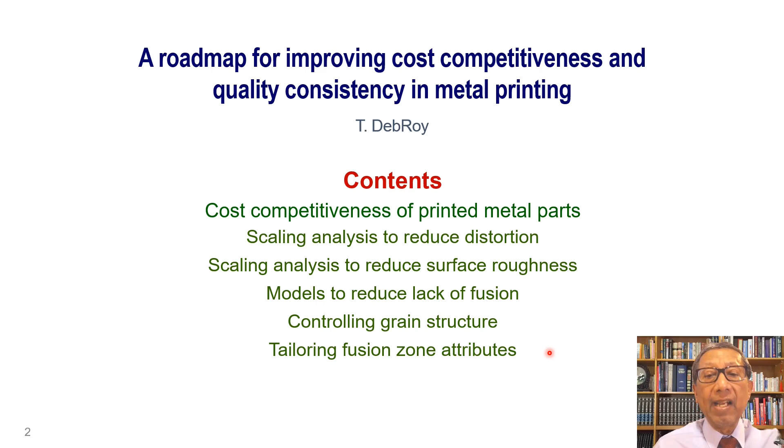For metal printing, both the feedstock and the machines are quite expensive. So it is fair to ask if the additively manufactured parts can be cost effective. And we asked that question several years ago, and we did a survey of the usage of printed parts in various industries ranging from consumer products to automotive, to healthcare, to energy, to aerospace and marine industries. And we found that parts made by additive manufacturing are widely used in all of these industries, and the different numbers here show the revenue share of the additively manufactured parts in those industries.

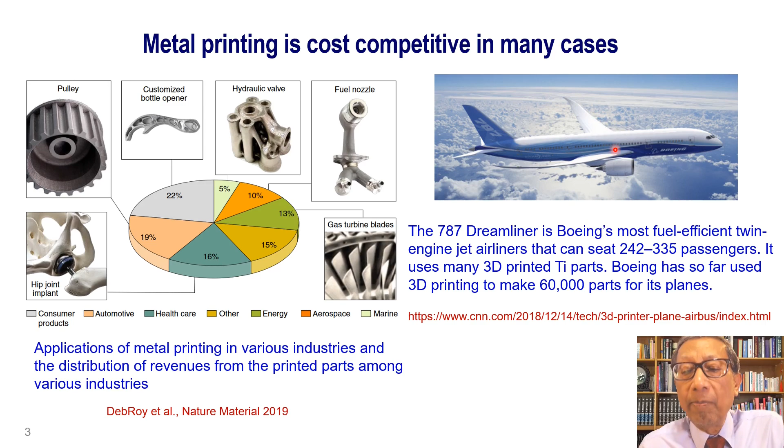On the right, we have the Boeing 787 Dreamliner, which is the most fuel-efficient twin-engine jet airliner that can carry several hundred passengers depending on the specific model. And it uses several 3D printed components. And other aerospace companies are also using 3D printed parts. So additive is cost competitive in many industries.

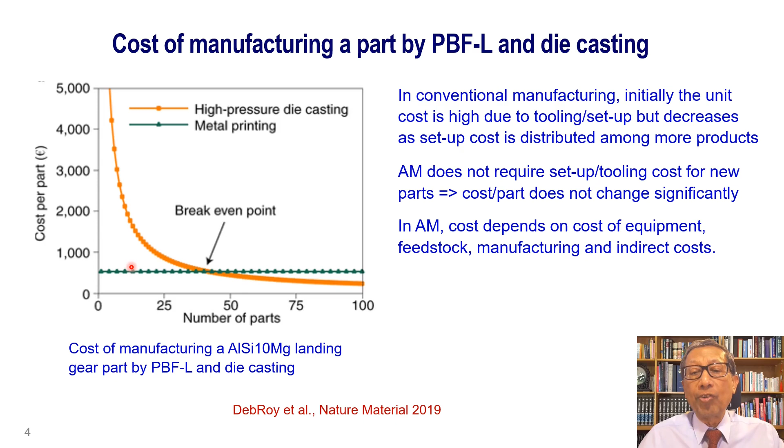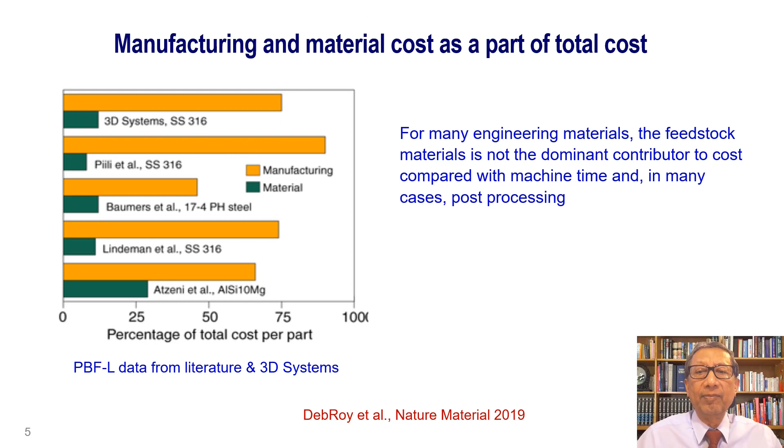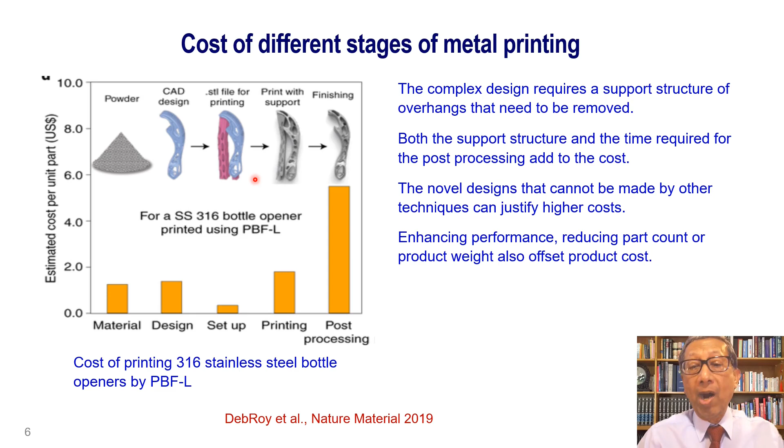Here's a breakdown of the various costs for the printing of a stainless steel bottle opener. This is a complex design and it needs a support structure shown here for printing. So both the cost of making this support structure as well as removing the support structure after the part is printed add to the cost. Now, if the part is so complex that it cannot be made by any other means, then the high cost may be justified. Similarly, reducing part count or part weight can also offset product cost.

Defects are very common in additive manufacturing. For example, there can be cracking, lack of fusion, residual stress and distortion, and in extreme cases, parts can be separated from the base plate, so there can be delamination, and also many of the alloys contain volatile components, and at high temperature they can be selectively vaporized so that the composition of the final part may be different from the composition of the initial feedstock.

So all of these defects have to be mitigated while a new part is being developed. And because the cost of the machine and the cost of the feedstock are pretty high, we cannot do trial and error testing that we can do with conventional manufacturing. So models provide a very good solution because they are based on scientific principles and they require a minimum amount of testing. So I'm going to give you two examples of models to avoid distortion and surface roughness.

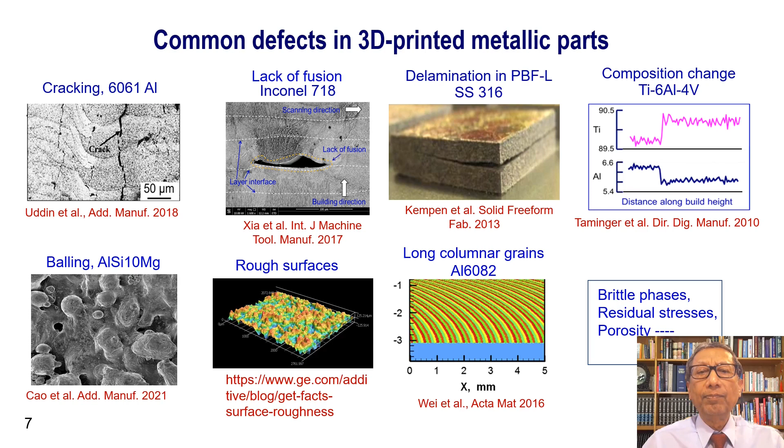Distortion is very common because of rapid heating and cooling. Important variables that affect the distortion include process variables such as power, speed, powder feed rate, and deposition time, and also material properties such as density, rigidity of the material, and other parameters affect the extent of distortion. So our goal is to express maximum strain as a function of process variables and material properties.

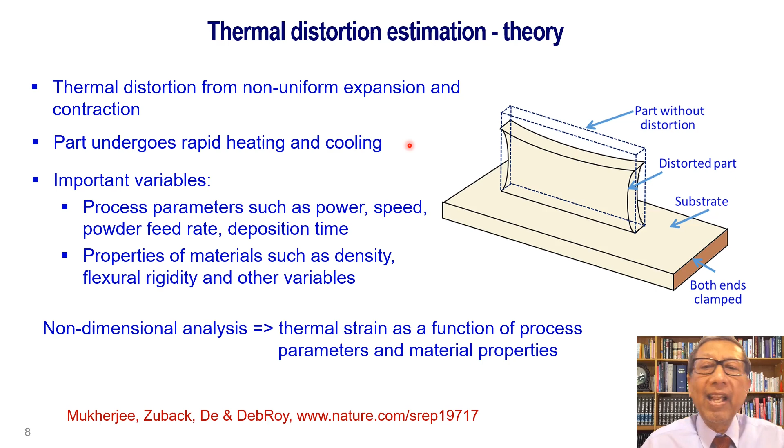To build a model for thermal distortion, we use scaling analysis based on Buckingham Pi theorem. The important variables are listed here. Volume expansion is the product of volumetric thermal expansion coefficient multiplied by temperature change, heat input per unit length. If the heat input is large or if the volume expansion is large, the part will be more susceptible to distortion. Similarly, if the total time taken is large, the part will be more susceptible to distortion.

Also, if the part is rigid, then it will oppose distortion. Higher density materials will also oppose distortion. And finally, Fourier number, which is the ratio of heat transported to heat stored. If the Fourier number is large, that means heat is transported quickly, and that will mean lower distortion.

So when we combine all of these variables into non-dimensional terms, we get 3 pi terms, and when we combine all of them, we get an expression for the distortion or strain, maximum strain, which is proportional to beta times delta T, which signifies volume expansion, and is proportional to heat input per unit length raised to the power 3 by 2. It's proportional to time, inversely proportional to EI, which represents rigidity, inversely proportional to F, which represents Fourier number, and inversely proportional to square root of density. So we are going to check how experimentally we can validate this expression.

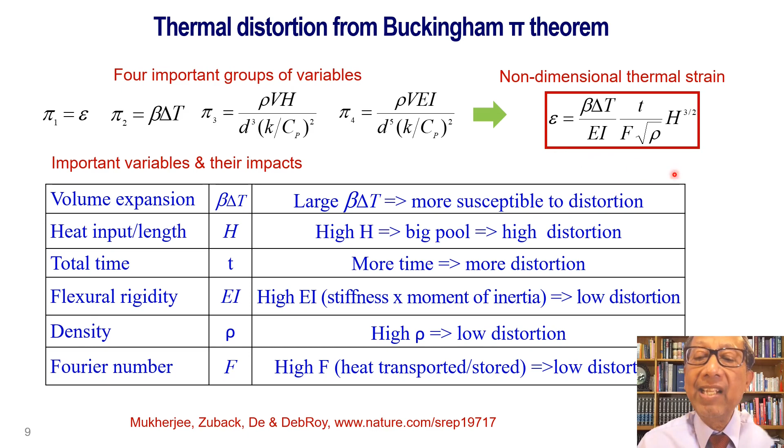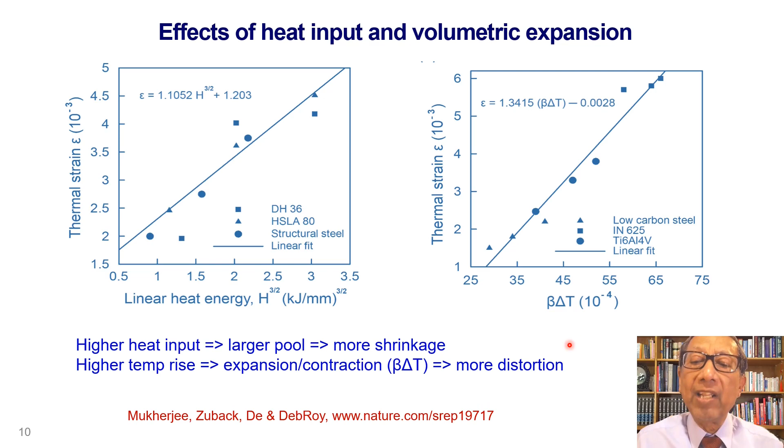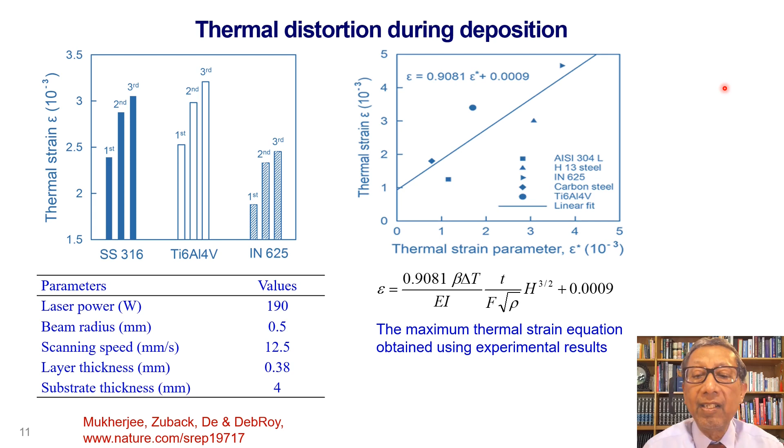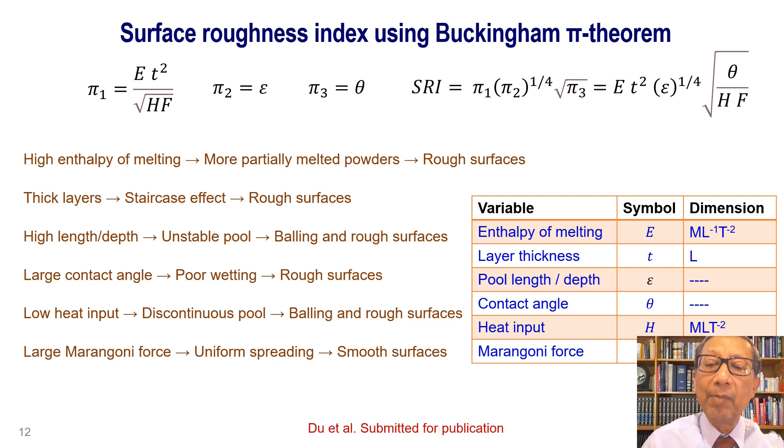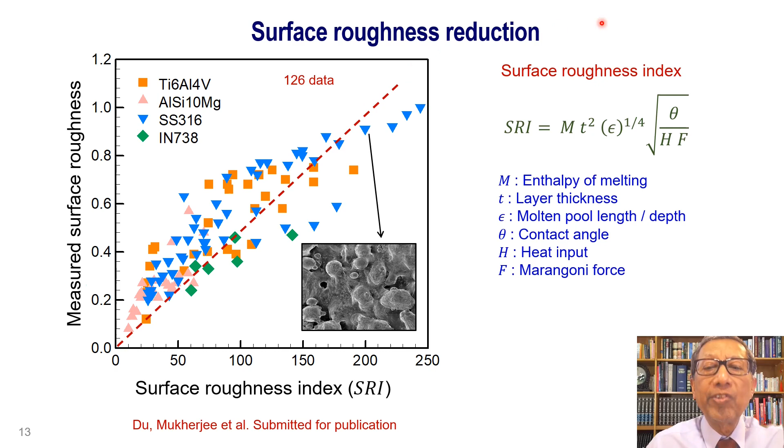And we can plot the SRI as a function of experimental data on these variables so that the model can be validated. Here we compare the computed surface roughness with the corresponding measured experimental values, and they seem to show a fair agreement with 126 independent experimental data. And these type of models, when they are validated, can be used to reduce roughness.

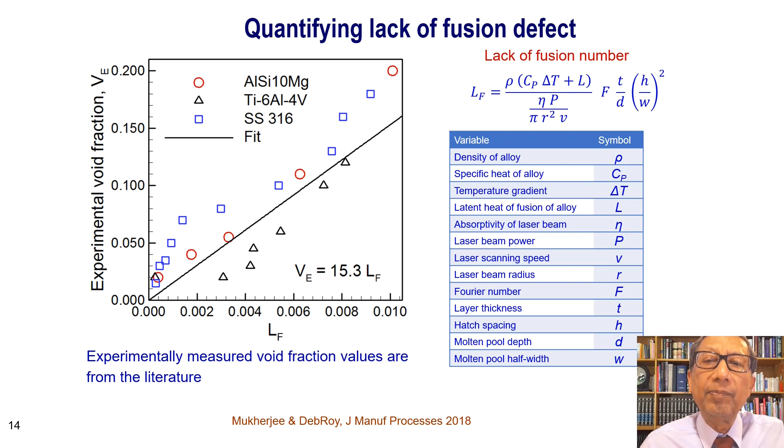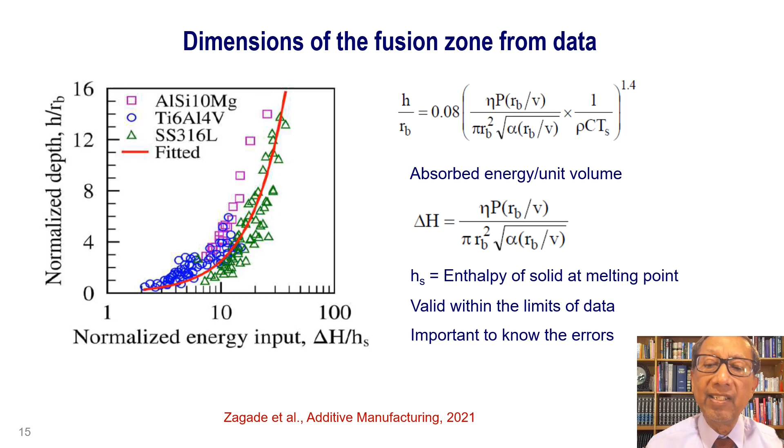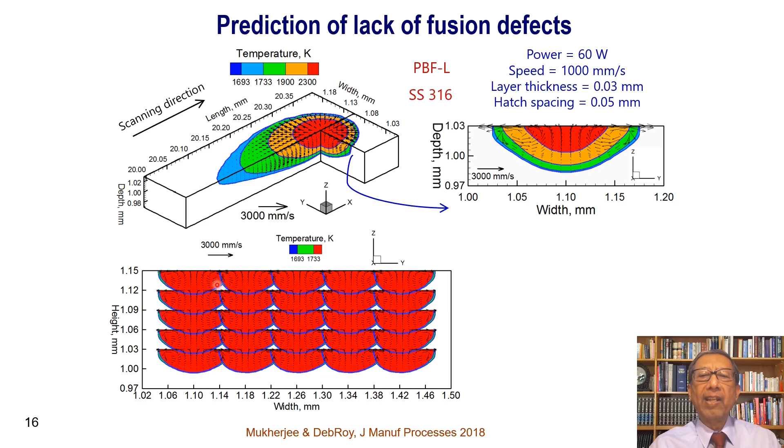A well-tested heat transfer and fluid flow model can calculate the fusion zone geometry in different hatches and different layers. And unmelted regions between the two consecutive tracks and layers indicate the lack of fusion defects. To make a fully dense part, there needs to be sufficient overlap among different adjacent hatches and layers. For a given alloy, higher power and slow scanning will result in larger fusion zones and less lack of fusion defects. And just the opposite will also happen.

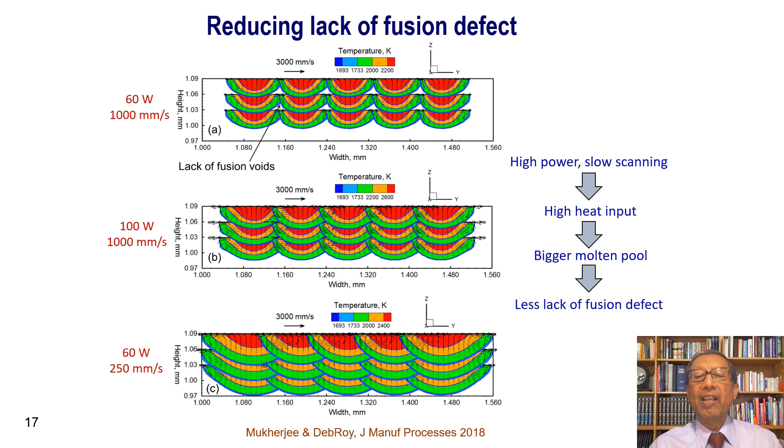That means if the power is low and scanning speed is fast, then the fusion zone would be smaller in size and there is likely to be less overlap between adjacent hatches and between layers. And for a given set of process variables like it is given here, the thermophysical properties of the alloys determine the size of the fusion zone. And this is what we see here. In case of stainless steel 316, the fusion zone size is smaller than aluminum silicon 10 magnesium alloy.

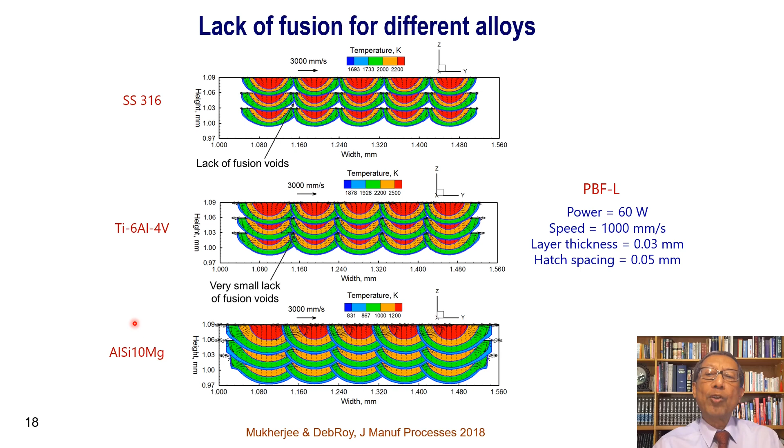And so in case of stainless steel 316, for these processing conditions, there is going to be lack of fusion defects, and in case of aluminum silicon 10 magnesium alloy, there is not going to be any lack of fusion defects. Heat transfer and fluid flow models can be very helpful in understanding the evolution of grain structure.

This figure shows unidirectional scanning of a laser beam from left to right. So the melt pool looks like this. The isotherms are compressed ahead of the beam and expanded behind the beam near the trailing edge. The primary heat flow direction is perpendicular to the surface of the fusion zone. This is also the direction of the growth of the primary dendrites. So the primary dendrites grow at an angle that is about 60 degrees with the scanning direction, and that is what we see in the calculations as well as in the experimental results.

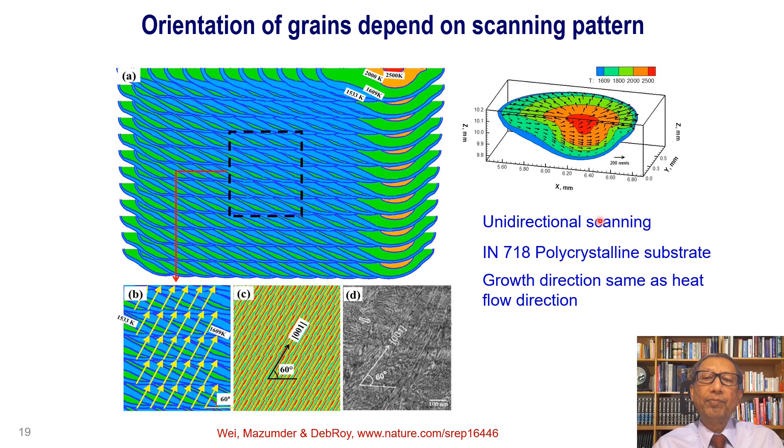Now consider a scanning pattern that alternates in progressive layers. That means in the first layer, the beam goes from left to right, and in the next layer, the scanning direction is reversed. So it goes in the opposite direction from right to left. So that is what we see here. The primary heat flow direction changes by 90 degrees. And that is also what one can see: perpendicular to this surface as opposed to perpendicular to that surface in the second layer. And so the heat flow directions would be very different in different layers.

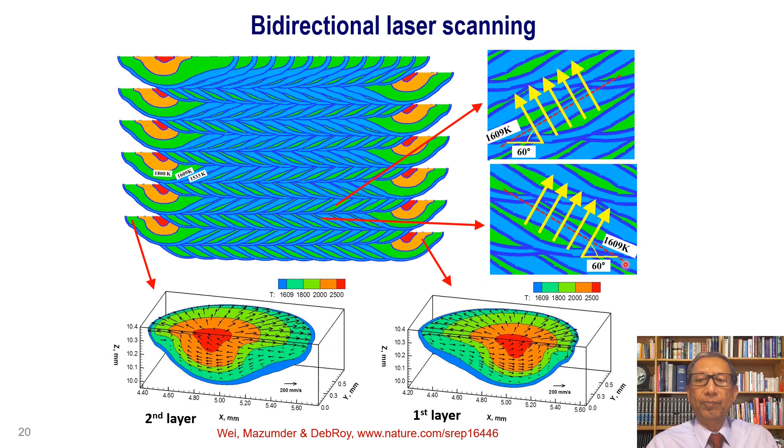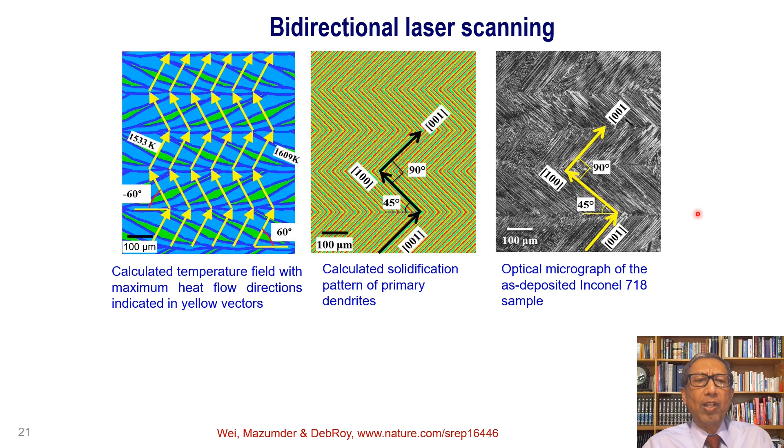Experimentally, what we see is that the growth directions of primary dendrites are at 90 degrees with each other. In each layer, the primary dendrites grow perpendicular to that of the previous layer. So there is a mismatch between the primary dendrite growth direction and the heat flow direction. The heat flow direction is 60 degrees with the scanning direction, but the primary dendrite growth direction is about 45 degrees with the scanning direction. So let us examine why that is so.

If the primary dendrites grew along the dominant heat flow direction, then this would be the solidification pattern, and the grains in different layers would be aligned to this pattern. But that is not what happens. If the primary dendrites followed the 60-degree pattern with the scanning direction, then it would have followed this path, the solidification pattern 2. But that does not happen.

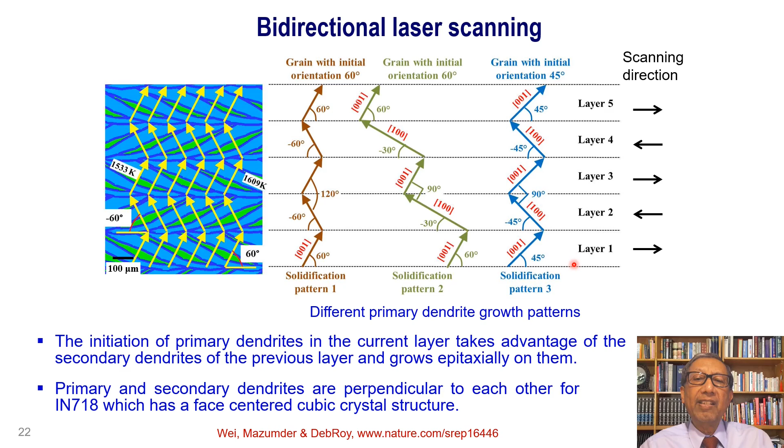The data are consistent with solidification pattern 3 shown here, where the primary dendrites grew from the secondary dendrites of the previous layers. The secondary dendrite of this layer is perpendicular to that layer, and that's where the primary dendrites of the next layer grow. And the growth pattern is zigzag in adjacent layers. It shows how the growth patterns can be adjusted by changing the scanning pattern.

So far, we have seen that both the scaling analysis using non-dimensional numbers as well as mechanistic models can be very useful to control defects as well as solidification patterns. But in many models, such as heat transfer and fluid flow model, one provides the process parameters and thermophysical properties of the alloys as input and calculates temperature and velocity fields, fusion zone geometry, cooling rates, and other attributes of the welds.

or other attributes of the fusion zone. But what if we want to compute the process variables needed to obtain a specific attribute? For example, I need to obtain a specific fusion zone geometry, whether it is for welding or additive manufacturing. Can the models help us to do that? And this is the classical inverse problem.

In most problems of this type, there can be multiple solutions. In other words, if I specified the fusion zone geometry, there would be different sets of variables that can produce that specified geometry. For example, if one is using an electric arc to melt a metal, there are many combinations of current, voltage, and scanning speed that would result in the specified fusion zone geometry.

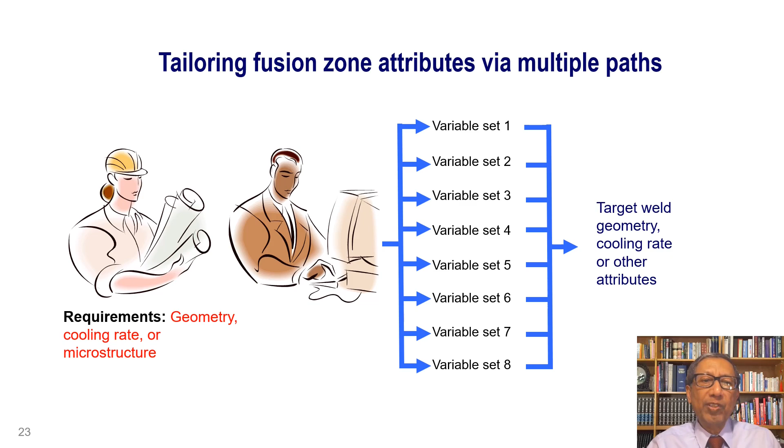So let's take an example. In our forward model, we specify current, voltage, scanning speed, and other variables such as thermophysical properties to calculate fusion zone geometry. We can repeat this exercise many times by providing many different combinations of variables and check what kind of fusion zone geometry we are getting, whether we can get a match between what we want and what we calculate. If there is a mismatch, we can go back and redo this.

Or we can construct a suitable objective function that will provide quantitatively a fit between what we seek and what we get. And in principle, we can do a bunch of calculations and find a suitable algorithm to search for the different combinations of current, voltage, speed, power distribution, and other variables that would give us the desired fusion zone geometry.

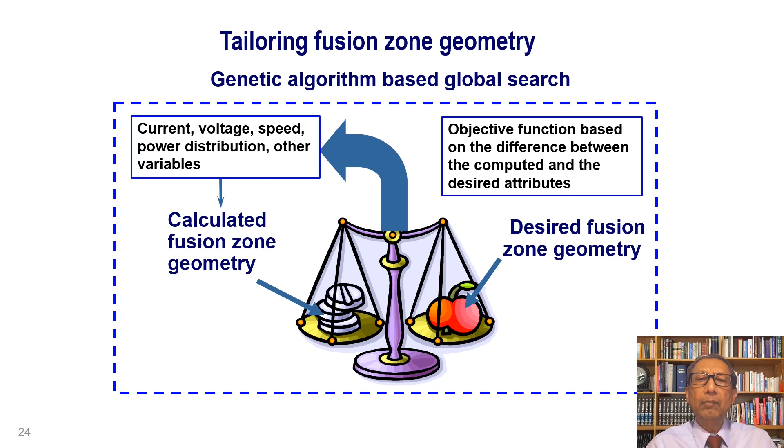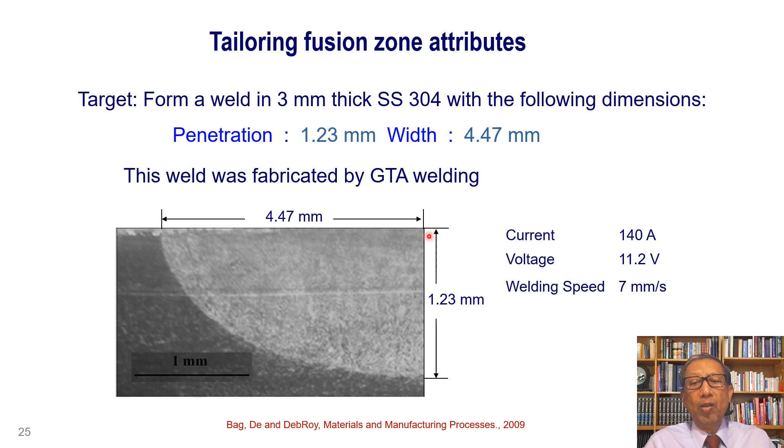I have a stainless steel 304 plate, and I do an experiment with certain conditions that are specified here, current, voltage, and welding speed, and I get a fusion zone whose half section looks like this. I want to know what other combinations of current, voltage, and scanning speed can result in this particular geometry of the fusion zone. So we start with a combination of many groups of current, voltage, and scanning speed, and we plot the objective function of the initial population of solutions as a function of current, voltage, and scanning speed.

And after many of these iterations, we get 8 combinations of current, voltage, and scanning speed that would give us acceptable objective functions. That means acceptable values of current, voltage, and scanning speed that would result in low values of objective function. That means we are now getting for all of these combinations the right width of the fusion zone and the right depth of the fusion zone. And there are 8 alternative variables that can give us that.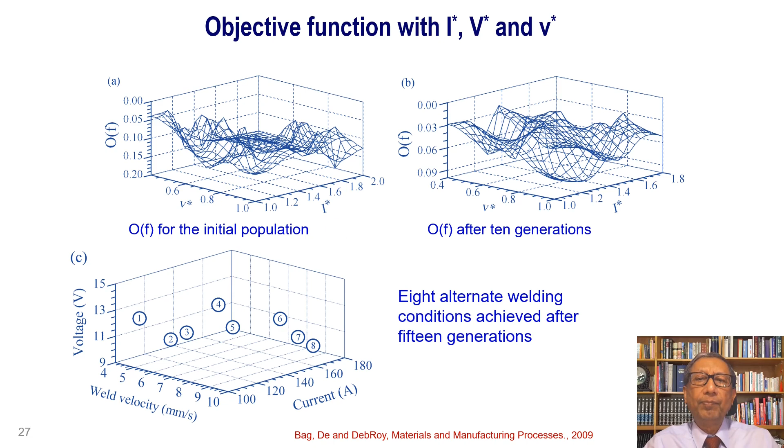Each of these solutions give us the fusion zone geometry we want, which is written here. Penetration 1.23 millimeter and width would be 4.47 millimeter. And in each case, for different values of current, voltage, and scanning speed, we get more or less the same depth of penetration and same width.

If we look at the values, current varies between 106 ampere and 167 ampere. The voltage varies from 9.8 volt to about 14.4 volt, quite a bit of variation. And the scanning speed ranges from 4.3 to 9.6 millimeter per second. But all of these combinations provide the similar penetration and width, almost the same value that we wanted. So we tested the calculations by conducting experiments.

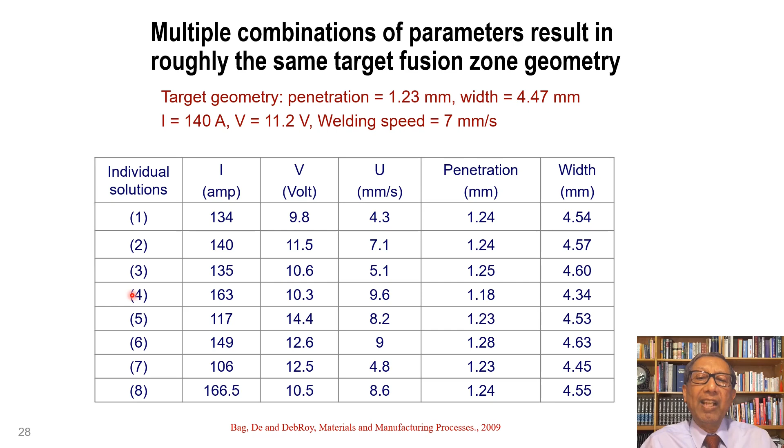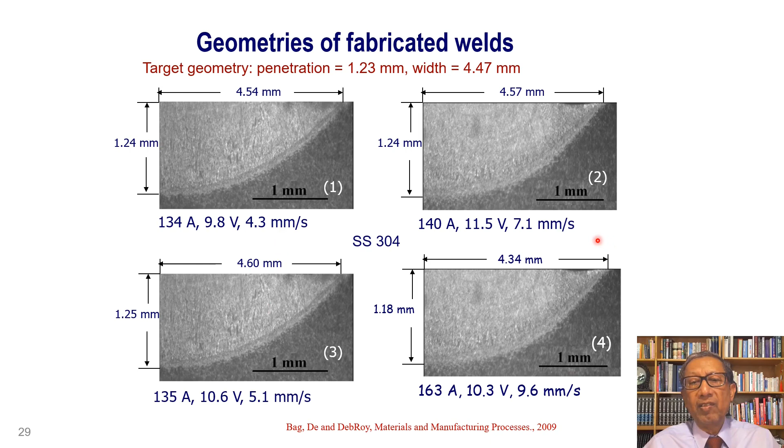We take each of these cases, we physically do an experiment, and then look at the depth and the width of the tracks and compare them with our specified values. So we did experiments using the different combinations of current, voltage, and scanning speed. And for each condition, we obtained a depth of penetration and the width of the fusion zone similar to what our target was. So all of these different combinations of variables could give us the geometry. What we computed matches with experiments. We could get the target geometry of the fusion zone via 8 different combinations of current, voltage, and scanning speed.

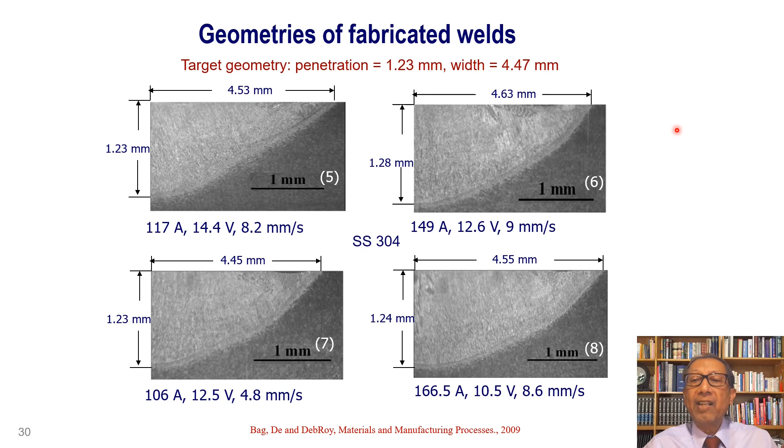We can also specify another desirable attribute, such as the cooling rate at a given location, and compute multiple combinations of process variables to obtain the specified target cooling rate. This example shows how inverse modeling can tailor fusion zone geometry and other attributes of welding or additive manufacturing.

For 3D printing, equipment and feedstock are expensive, but when the parts are largely defect-free, they are cost competitive for a wide variety of applications. Rapid movement of high power density heat source, powders and liquids, and repeated heating and cooling results in many types of defects in parts. Various types of models ranging from non-dimensional analysis to mechanistic models to complex reverse models are very helpful to improve cost competitiveness and quality consistency.

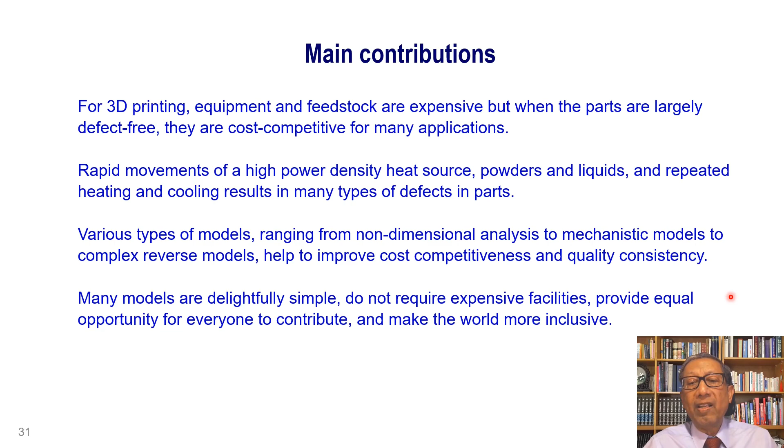Many models are delightfully simple. They do not require expensive facilities. They provide equal opportunity for everyone to contribute, and they make the world a better place and a more inclusive place.